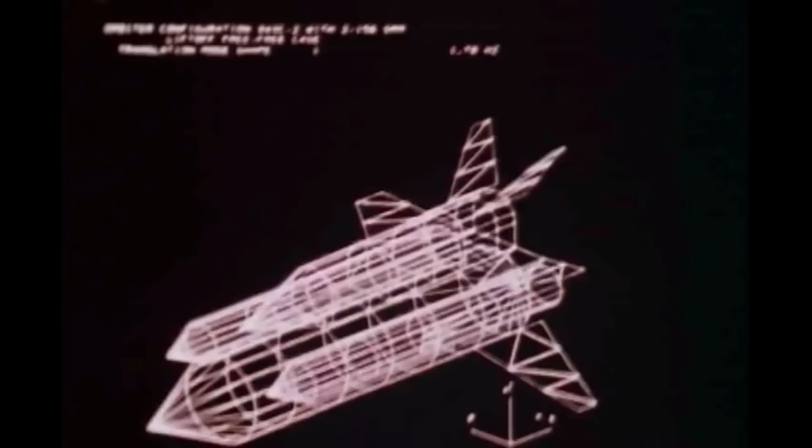So you can do tests on airplanes in wind tunnels with air as the fluid, or you can do them in water. You could substitute them, you just have to know how to translate the behaviors that you see in these different media between them.

And of course, Buckingham PI is one way, the first step in being able to figure out exactly what the controlling variables are that you should get right in your test so that the test is representative. And then the next step is to do a study on similitude, which we'll talk about today.

That allows you to make sure that your experiments are comparing apples to apples.

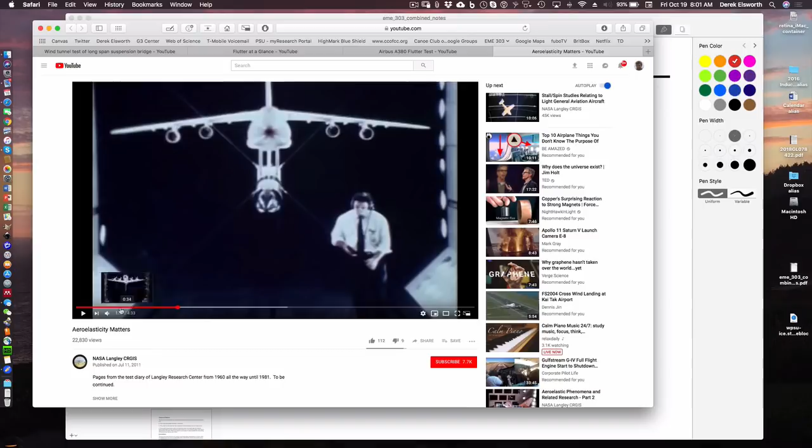I guess I don't have this playing in the background, and I don't know if this is much different. Let's look at it, we have some time this morning. I'll shut up for a moment.

That's 4 minutes. We have 4 minutes.

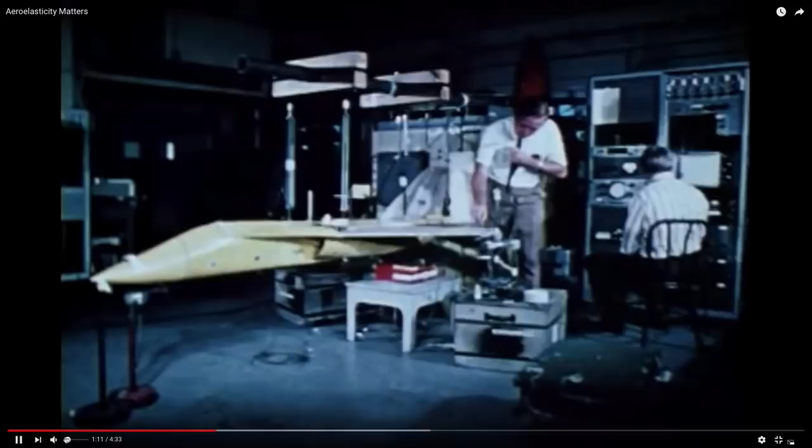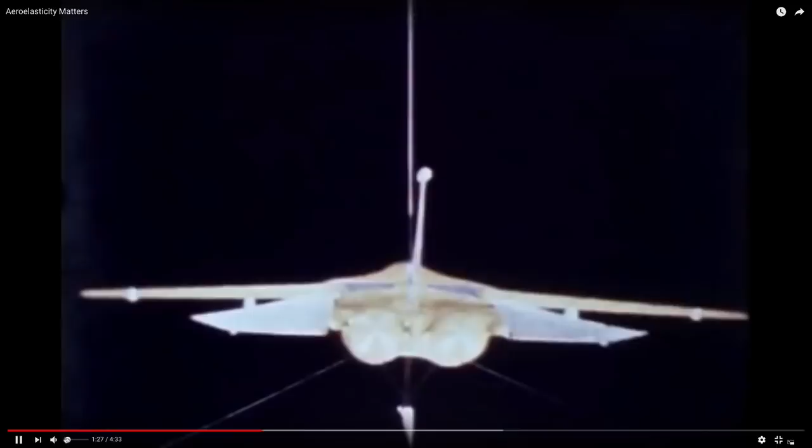Of course, this was the golden age of things like aeroelasticity. This is the late 1950s, early 1960s - Sputnik, the first satellite in space put up by the Soviets, and Kennedy's call to put a man on the moon over that decade. So understanding the behavior of flight structures, planes, missiles, rockets, was part of a national priority. And fluid mechanics and understanding these behaviors in wind tunnels is a big part of developing that understanding. So that's kind of maybe the heritage of some of this stuff.

So yeah, maybe you call it a day there and look at what we've done so far.

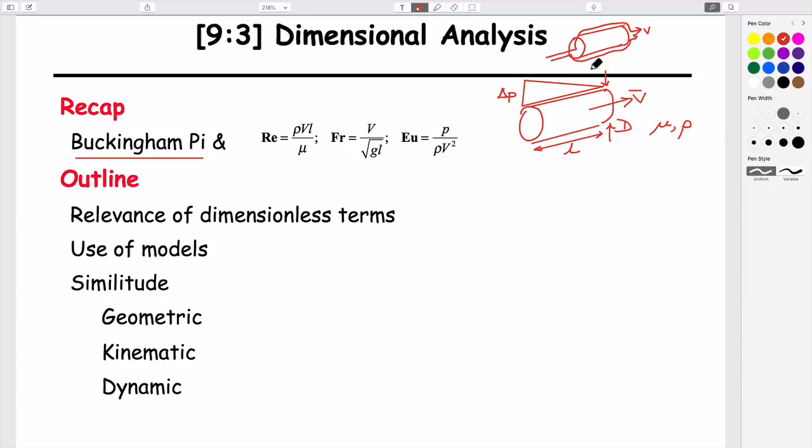In flow in a pipe, we're interested in what the velocity is as a function of the friction losses that occur within the pipe due to these viscous losses. Flow around a plug, an external structure, we're probably more interested in figuring out the magnitude of the force that we have to hold this with to be able to counteract the flow that's coming past it. So there are different things we're interested in, but really it's actually the same process.

And you recall that what we said was that maybe the change in pressure is equal to some function of the other parameters. And the other parameters are the diameter, the velocity, and the fluid properties. And we chose to lump this length variable in the form of what we call delta P over L. So from our formalism for Buckingham PI, the number of parameters describing the system are 1, 2, 3, 4, 5.

The number of M L T's was equal to 3, because all of those are represented. And as a result, what we called k minus r described the problem in terms of 2 pi variables. And those variables were, once we rearranged it in a certain way: pressure over length, V squared, rho times D, and it's some function of velocity, density, a characteristic dimension, and viscosity.

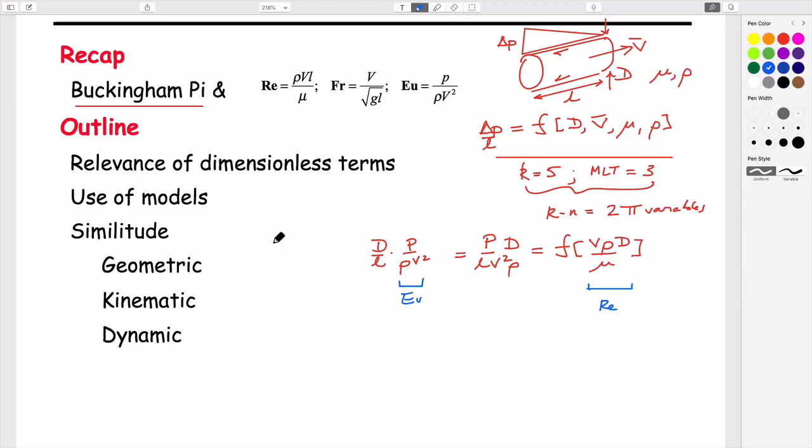We made the point that these are important parameters which we'll use when we talk about similitude, which we'll get to a little later. What we could also have done is, instead of defining the behavior in terms of these 5 parameters, we could have defined it in terms of 6 parameters by adding, in addition to those 4 on the right hand side, velocity, diameter, viscosity, and density, the length variable as well.

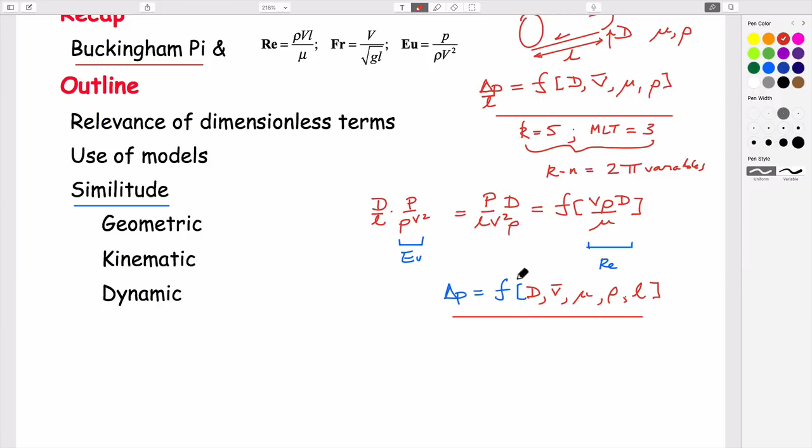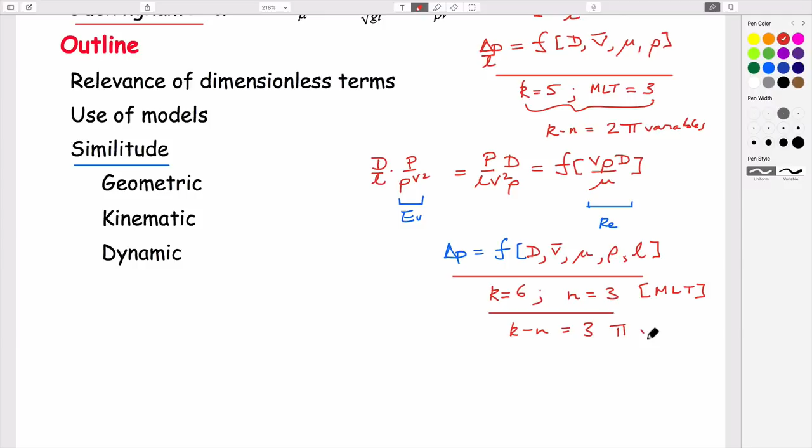If we'd gone through this with the same analysis, K would have been 6, N would have been 3, because mass, length, and time are all represented. As a result, k minus r would equal 3 pi variables. That would give us the Euler number, p over rho v squared, equal to some function of L over D or D over L, and the Reynolds number would come out of it.

So the parameters that come out of it aren't unique. They definitely are dimensionless by definition. We can check that, and we have checked that.

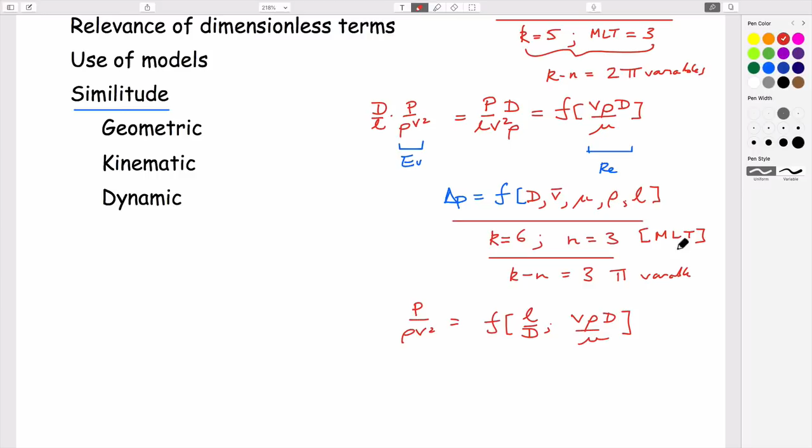If we chose some extra variables, we'd find that if we added something like relative roughness—since pipes aren't infinitely smooth with zero undulations, you could imagine the magnitude of some roughness, which we'll call epsilon, the height of the amplitude of roughness in the walls—if we had that as an extra variable, we'd have 7 variables, still with a maximum of 3, so we'd have another dimensionless variable, something like this.

So as you add extra variables to define your system, you end up with more dimensionless groups. Of course, some of these parameters might not be of any interest in controlling the system, but you have them anyway, and you could do experiments to eliminate them and see if they have any influence on the system.

So the supposition from this would be—we did it before—let's see, we had the fact that if we know the actual relationship for flow in a pipe, the average velocity is equal to the diameter squared over 32, times 1 over viscosity, times dp dx. That's a solution for laminar flow, which anchors the velocity of flow at the wall to be 0 and has a maximum in the middle.

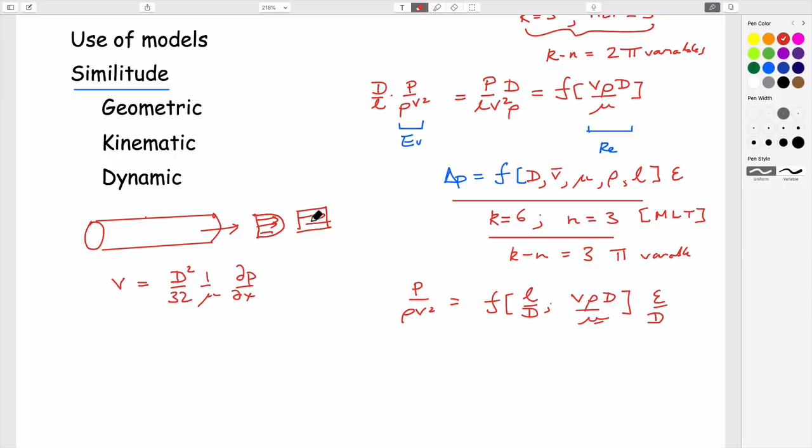We're interested in kind of an average, an assumed average velocity, which we call v bar. I think we did this last, maybe on Monday. We could convert this into something useful in terms of what we think is controlling the system, in terms of Euler number and Reynolds number, by making this an Euler number. So to make it an Euler number, or 1 over an Euler number, we could multiply both sides by v.

We could multiply both sides by density, and divide both sides through by P or dP. Our reason for doing that is now we get rid of this—we don't care about the dP. If we write that out in longhand, we have rho v squared over p, which should be familiar.

We take one of these d's and put it over here. We're going to have v times density times a characteristic dimension, d, and we're going to have mu rather, and we have an extra component here. This we can substitute for L. So we have rho v squared over p is equal to d over L.

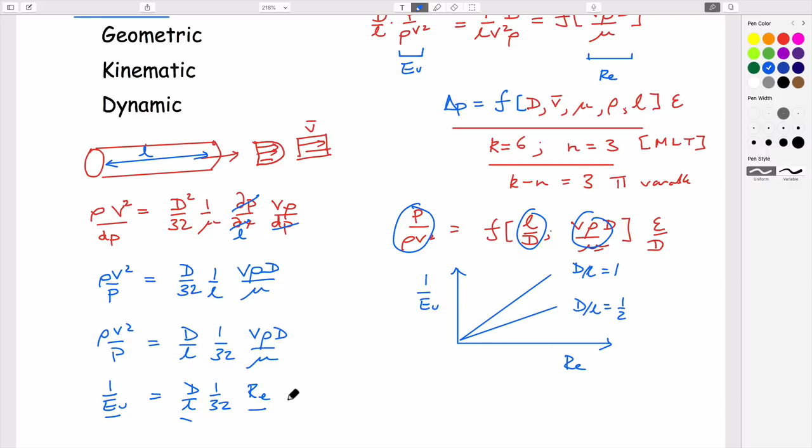This suggested there were three variables, this one and this one, before we added this fourth variable. This describes what goes on in the system. So what we'll find is that as we look at these behaviors, we could plot this as the reciprocal of Euler number, or plot Reynolds number versus Euler number. If we do that, we can imagine low Reynolds numbers will have a big Euler number, and at high Reynolds numbers we'll have a small Euler number because of this relation. This is the relationship we've kind of drawn a couple of times before.

This may look something like this. This is laminar, for which this is the equation. It's only laminar behavior, and we don't know what it's like at turbulent response, but what we'd find out is that if we looked at this at the turbulent regime, the behavior looks like this. We'll do that soon enough.

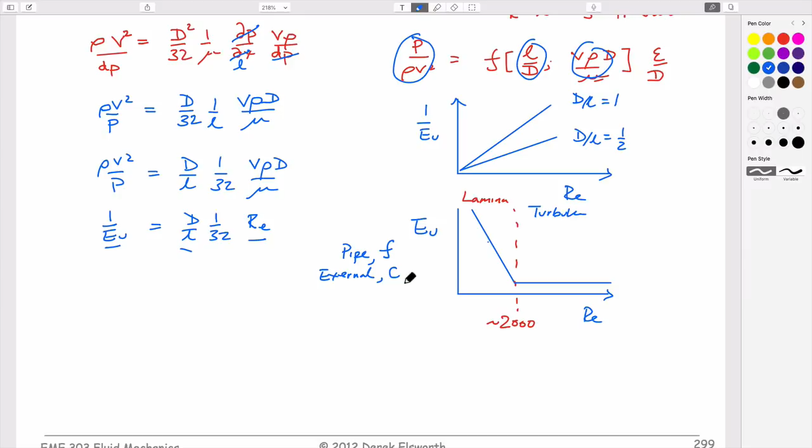So the important thing is this is kind of an Euler number. For pipe flow, we'll call this a friction factor. For external flows, we'll call this a coefficient of drag or a coefficient of lift. And for open channel flows, we'll call it a Manning number.

But they're essentially the same behaviors. They are defining some frictional losses within a system which are due to the viscosity of the fluid, or two terms I guess. This part here is due to viscous drag. This part here is due to inertial drag, accelerations that occur by making eddies.

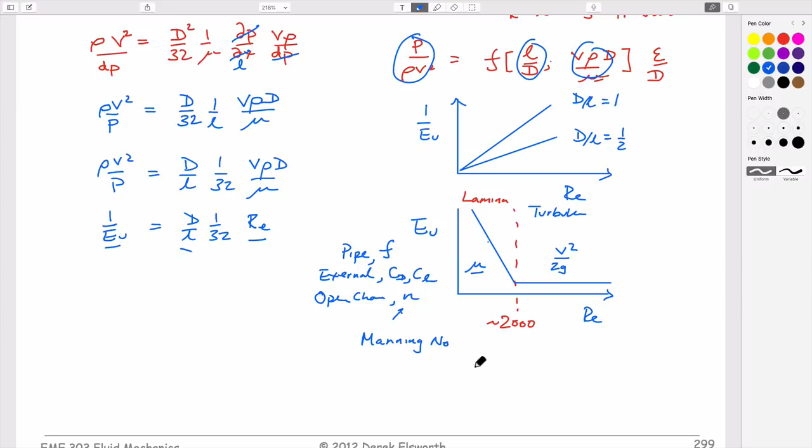If we look at the flows that occur in these, you might remember we had this little pipe flowing last time, if you were here. Within that pipe we had some flow, and with this little tracer in the middle, for laminar flows it was a straight line. But for higher Reynolds number flows, it started getting an undulation, and even faster ones got a larger undulation. This is because little vortices are occurring within the pipe that make it not laminar flow. Laminar, by definition, is a whole bunch of laminae sliding over each other.

This behavior is true when we're looking at internal flows inside pipes, external flows around windmills or wind turbine blades, or open channel flows in a ditch - there's some frictional loss that occurs by dragging the fluid against the structure. At very low Reynolds numbers it's just due to viscosity, and at much higher Reynolds numbers it's due to the fact that we get this turbulence being developed. So that's uniform in the things that we'll do.

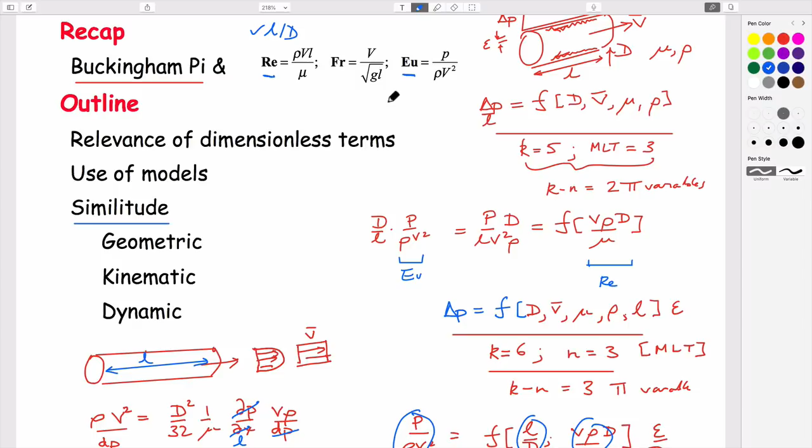So the idea of similitude is that we can use Buckingham Pi, a very powerful method, to figure out what the important dimensionless variables are. It will often turn out that they will be a ratio of lengths, L over D, a ratio of inertial forces to viscous forces in the Reynolds number, and a ratio of pressure forces applied on a structure relative to inertial forces around it, which is part of the Euler number. That, if you like, is the essence of what we can use to look at similitude in terms of these three requirements we alluded to last time that we have to satisfy.

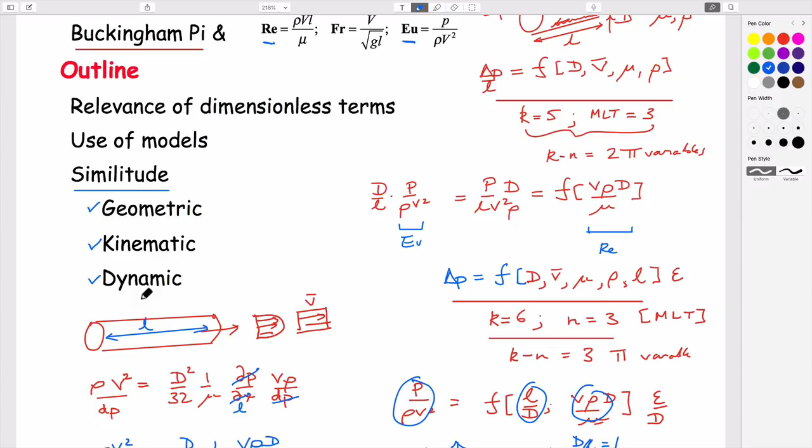That is, if we want to do wind tunnel tests on a small structure of a plane, we have to satisfy these three requirements to be able to use it in a quantitative measure to figure out exactly what the lift and drag might be.

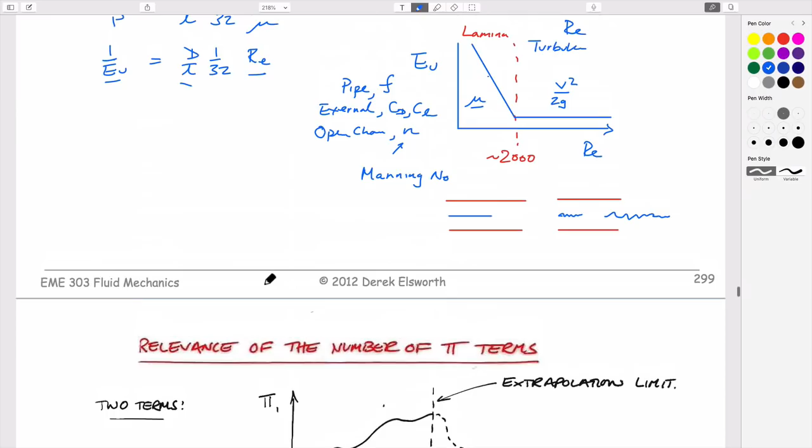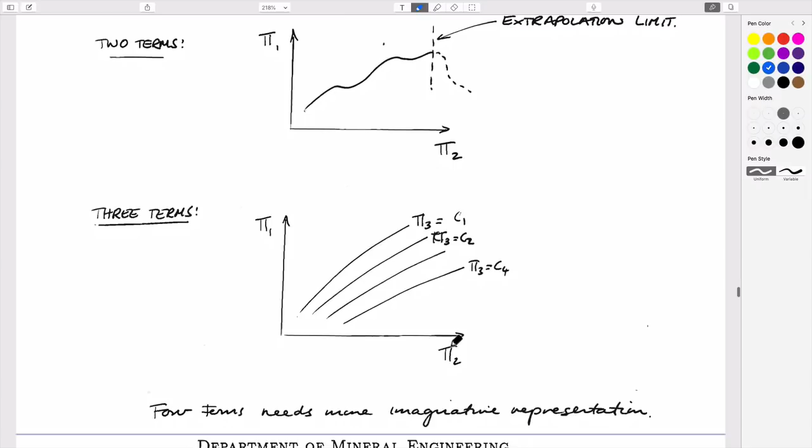This is just reiterating what we said. If you have two pi terms, then if you plot pi 1 against pi 2, there'll be some relationship and only one relationship. If you have three pi terms, as we did here, then you have three variables - pi 1 and pi 2, and then the other. So this is Euler number, this is Reynolds number maybe, and this is length over diameter ratio that defines the behavior.

So, if we want to use models, and we can do an example with this, we basically have to satisfy three requirements. It's quite straightforward. The first is that the model has to be a correct representation of what we're dealing with - so the plane has to be scaled down in every dimension. The model and the prototype have to look exactly the same as each other. So basically this is saying the length of the model and the prototype have to be equal to the width of the model and the prototype.

All of the dimensions have to scale, so it has to be a 1 to 100 scale model. And you know what that means. So if this is the model, this is an appropriate model for this prototype, but this would not be, because the length to height ratios are different. So that satisfies that you're looking at the proper structure.

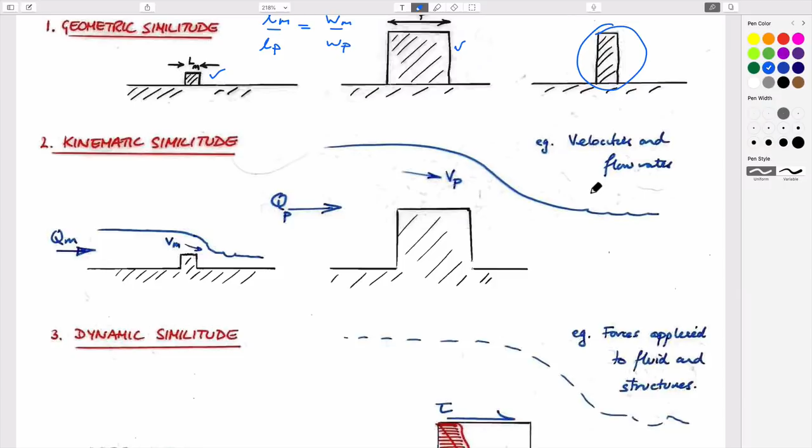The second one is that you have to satisfy kinematic similitude, and that is an exposition of the fact that the flow regime has to be the same.

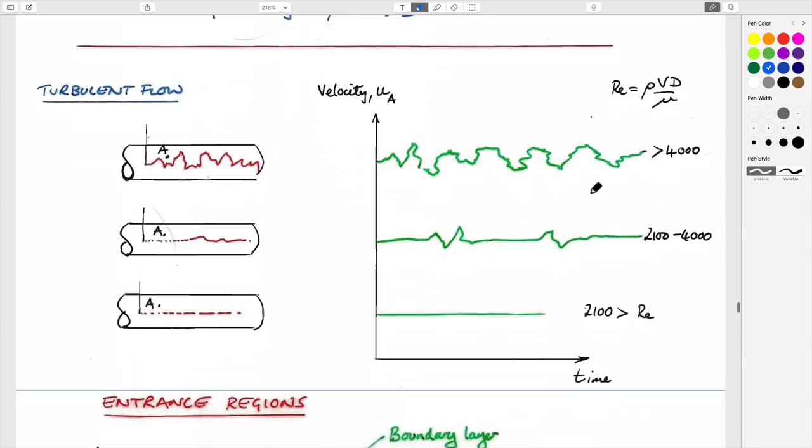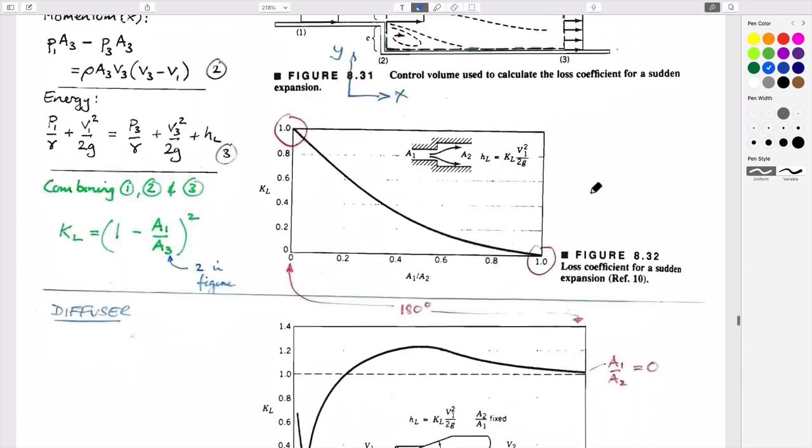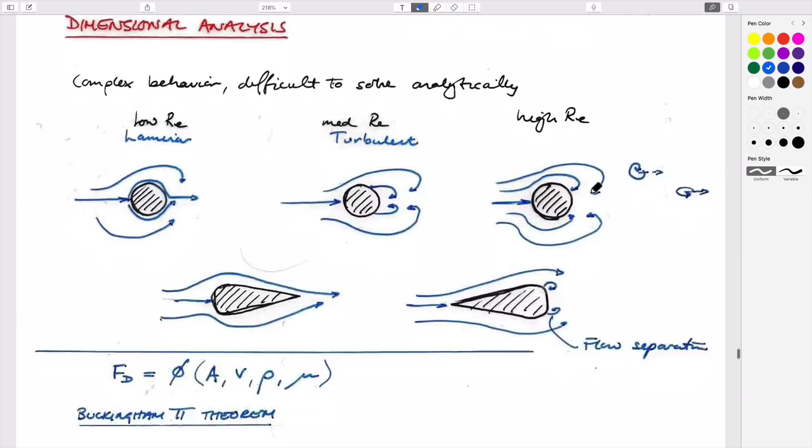Let me zip down through this to maybe what we'll talk about when we talk about external flows, because I think we've got some pictures of those. Maybe it's a bit further than I want it to be. It's a very specific diagram that I haven't... oh, these are, yeah, actually it's a long way down. So let me try and find it. Yeah, this. So there's probably a better figure than that somewhere down here.

We made this point before that if you look at Euler number, which is also coefficient of drag, we have this behavior. This is Reynolds number, maybe this is 2000, and this is laminar, controlled by viscosity, and this is turbulent, controlled by inertial behavior.

So the idea here is that the flow comes in, it's happy to come along here until it reaches a stagnation point, it divides, and it absolutely hugs this surface as it goes out on this side, and it absolutely hugs this surface as it goes out on that side. So you can imagine that the fluid exerts on this some kind of shear force, which is due to this idea of viscosity being related to the gradient of the velocity close to this.

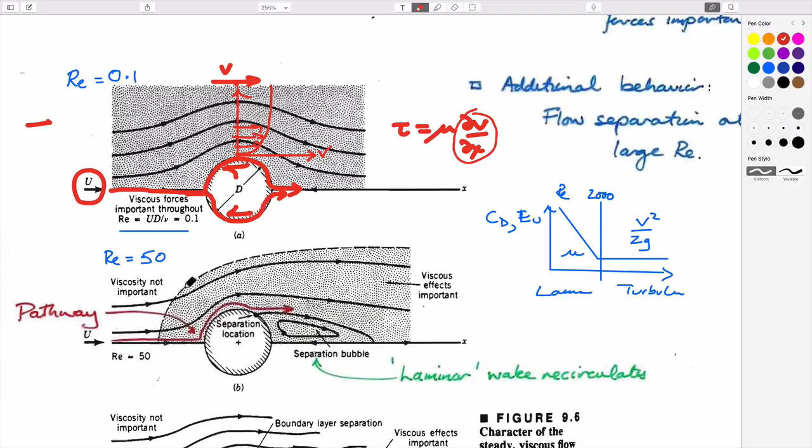If you look at higher Reynolds numbers, then what you end up doing - it's not shown very well here, actually this is even higher, right, this is probably a better one - so this is 10 to the 5, so 100,000, not just 2,000, but 100,000. Then what you get is a boundary layer developed, which is a layer where there's lots of turbulence occurring, but it's quite efficient at moving things around.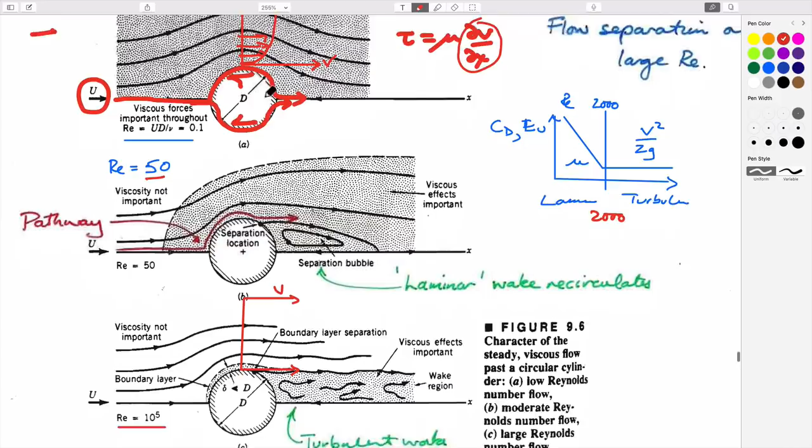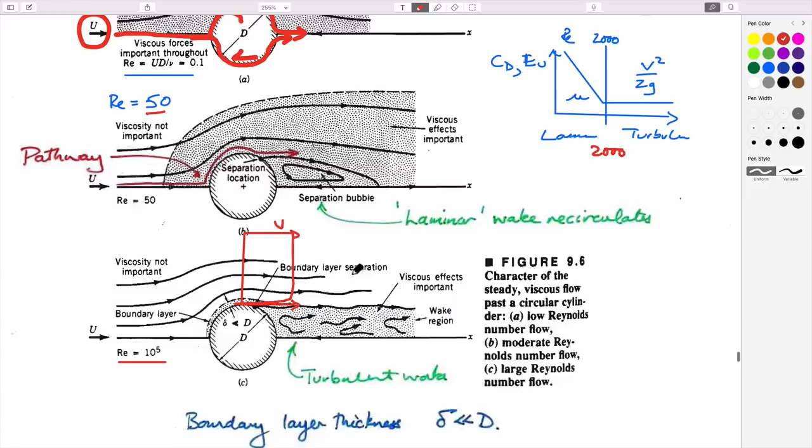If you look at the velocity profile as you go from here, you'd find surprisingly that this external velocity u, which we have at this point here, as you come close to this, it would look much closer to being this, almost like a boxcar - only when you get very close to this surface does it go to being... So you have a very large gradient here, which would suggest a very large shear force, but that's kind of isolated because you have this flow occurring on that boundary layer, which is actually quite thin.

And so there are two things that are important here. One is that now the drag on this is made up all of this changing in velocity that's occurring here. And this velocity term here, you remember, is this.

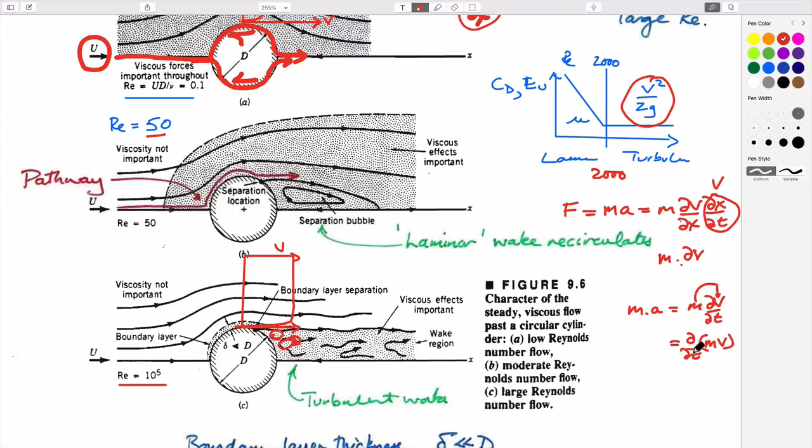So this, by definition, is velocity. This is mass times rate of change. Actually, you can do it just like this: mass times acceleration is the same as mass times the rate of change of velocity, which is exactly the same as the rate of change if we take this inside here. So this is rate of change of momentum, which is exactly what this term here is.

So there are these two very important regimes, and that's the reason we're interested in doing experiments in wind tunnels. It's quite easy to get solutions for the laminar regime, but not so easy for these different kinds of geometries. So these two different behaviors matter at these different regimes.

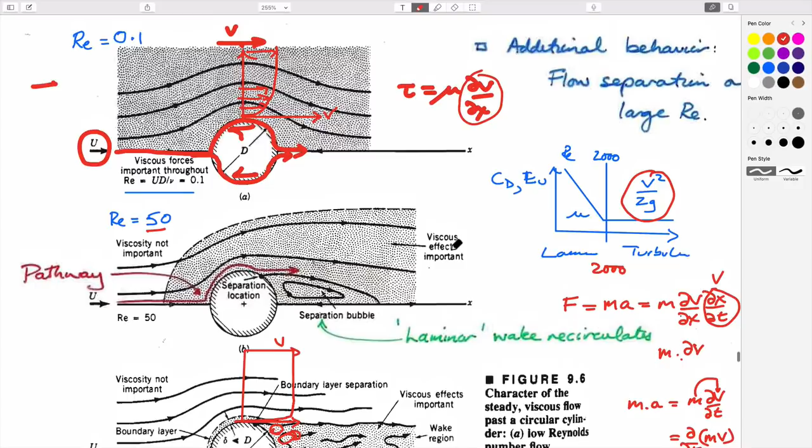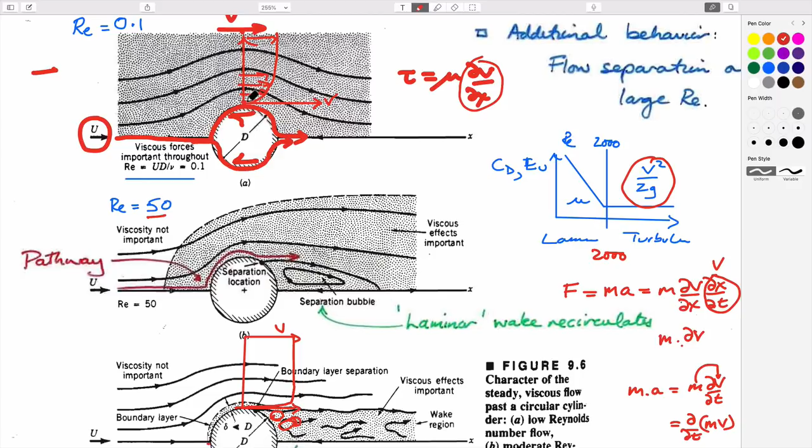The second point is that we want kinematic similitude: the flow regime around your model should look exactly the same as the flow regime you expect around your prototype plane when it's flying. If the flow regime around your model looks different from the flow regime around your A380 when it's flying, then you don't have similitude, and you can't use the results.

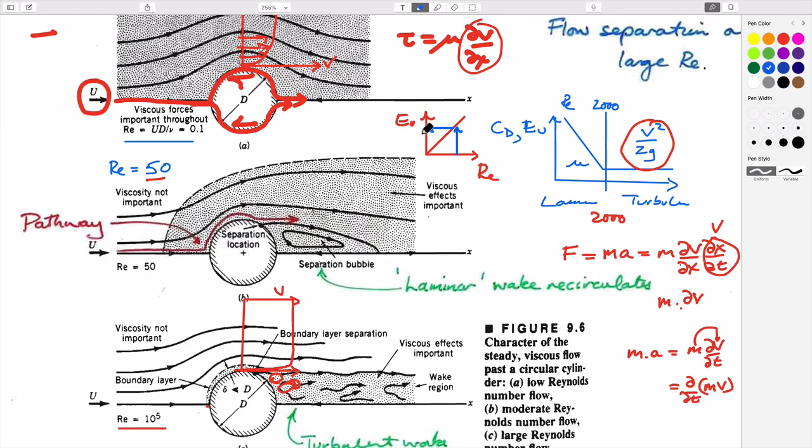In the most basic form of what we're attempting to do, we want a graph of the forces on the structure versus the Reynolds number. We expect a relationship linking these, and so long as we use the same Reynolds number in both model and prototype, we can use the same Euler number and get an exact solution. So that's kind of where we're going with this. That was maybe more of a diversion than we needed.

I think I'm in the right zone here to find that piece. Okay, so kinematic similitude means that geometrically the flow regime looks exactly the same in the model and in the prototype. And if that's the case, then we presumably also satisfy dynamic similitude.

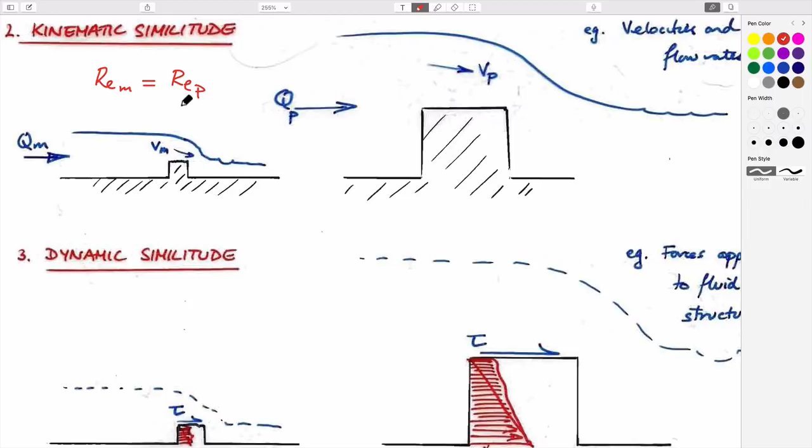This just means the Reynolds number of the model has to equal the Reynolds number of the prototype. Dynamic similitude means the Euler number of the model is equal to the Euler number of the prototype. So if in your model, where the flow is at an appropriate Reynolds number relative to your prototype, you measure the forces applied - your airplane on the stick, or the Raptor gets picked up by lift from the airflow around it - you measure that force, you measure the drag, then you can convert that into the appropriate forces on a life-size structure.

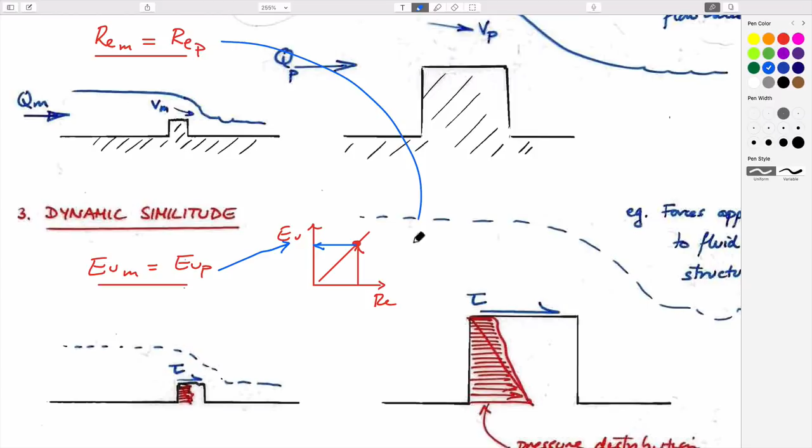So really this is just using, in its basest sense, the idea that if you have these two main variables that control response, you have a relationship between them. You don't actually need to know what this relationship is, because if the Reynolds number of both the model and the prototype are the same, then you're always at this point - not anywhere along here, just at this one point. And if you're at this one point, you can always define that this is this point here, and this is this point here. That's it, that's the idea of similitude and how it might apply.

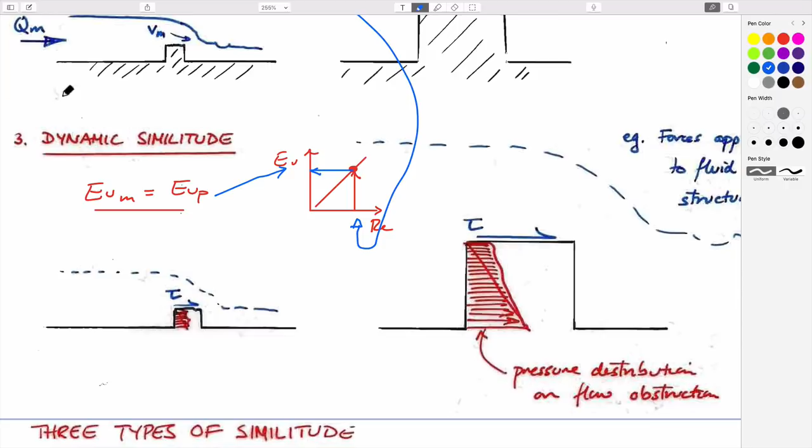The easiest way to show that might be to do an example by hand. There's some in the book as well, which we can get to if we have time. But this is just a simple contrived example of a model plane and a prototype.

So the idea is that we have a plane in a wind tunnel. Let's see how good I am at drawing this. This is the tail plane - pretty good, don't you think? It has a wing length, a wing width of the model. And we have a prototype which hopefully should look the same, with a wing length or span of the prototype, and a wing width of the prototype.

There's some velocity in the model, and some force due to lift on the airfoil of the model. So I have some numbers for these - what are we going to do? The length of the model is equal to 1 meter. The width of the model wing is 1/10 of that. The velocity is equal to 1 meter a second, just keeping life easy. And the force is equal to 1 Newton. So all of those are things that we could measure.

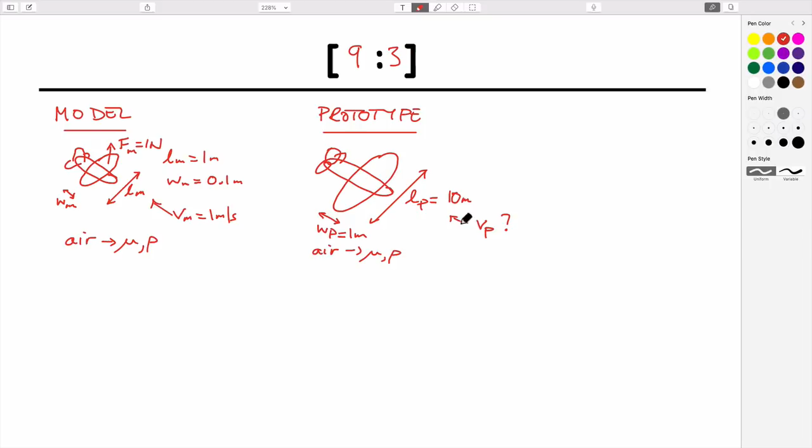And we use this length to be equal to, for the real plane, 10 meters. This is equal to 1 meter. And I guess the questions would be: in the prototype, what is the velocity we fly at? And at that velocity, what would be the force that we get out of it? So that's a simple example.

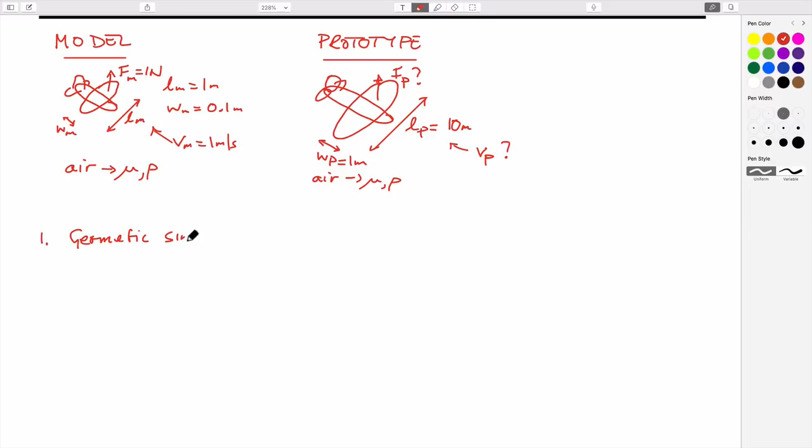So we just need to approach our three requirements. So geometric similitude: the length of the model to the length of the prototype is equal to 1/10, right? The width of the model to the width of the wing of the prototype is equal to 1/10. So all of these characteristic dimensions are shrunk down. So we've satisfied that, we've ticked off one of them.

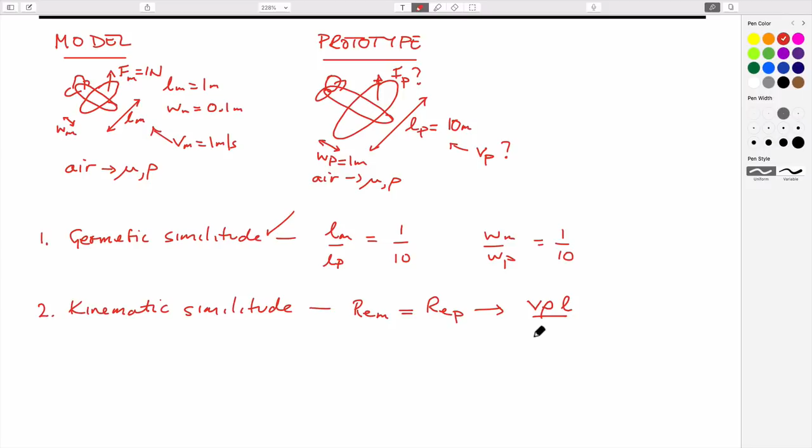The second is kinematic similitude. By definition, we want the flow patterns around each of these systems to look the same. So that means the Reynolds number of the model has to equal the Reynolds number of the prototype. That means velocity, density, and some characteristic length dimension - it could be any of our length dimensions - and the viscosity of the fluid for the model has to equal the same for the prototype.

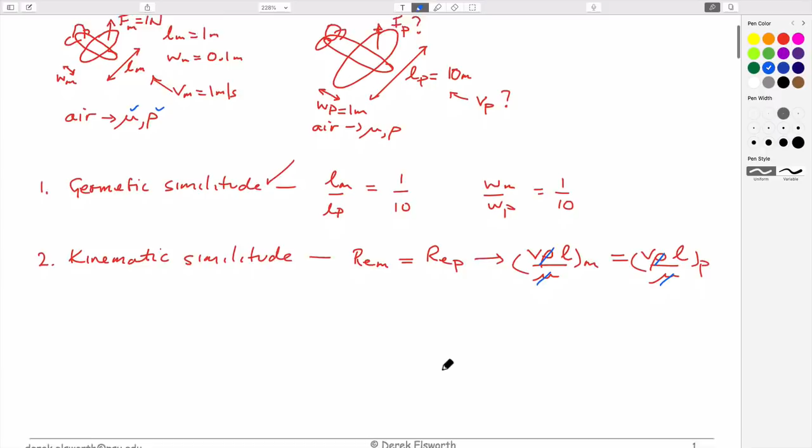We're flying in the same materials, so we know that these will cancel out with each other. And so from that, what do we want to know? We want to know what the velocity of the prototype would be. And so I suppose that would be the velocity of the model multiplied by the length of the model divided by the length of the prototype, which is this here, equals the velocity of the prototype.

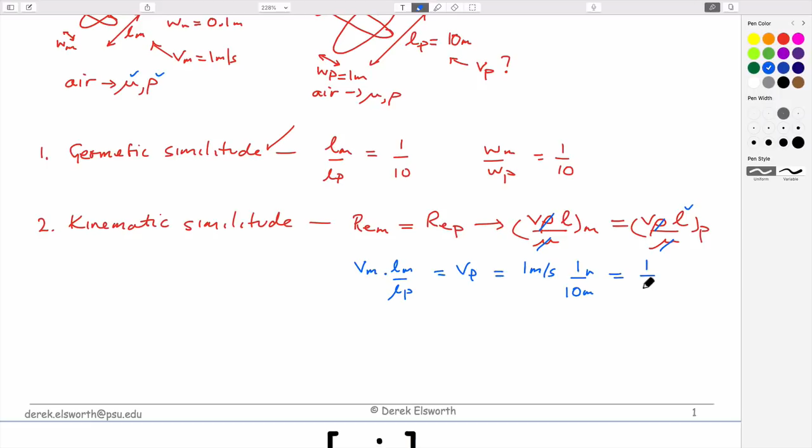So if you put those numbers in, the velocity of the model was 1 meter a second, the length of the model was 1 meter, and the length of the prototype was 10 meters. So that is equal to 1/10 of a meter a second. So that's saying that if we run this as 1/10 of a meter a second, then we satisfy this requirement.

And so that means that on this figure where we plot Euler number versus Reynolds number, we're exactly at some point - let me get rid of this - we're exactly at some point which is the same Reynolds number for each one, and therefore the Euler numbers should be equivalent to each other. We're at this point.

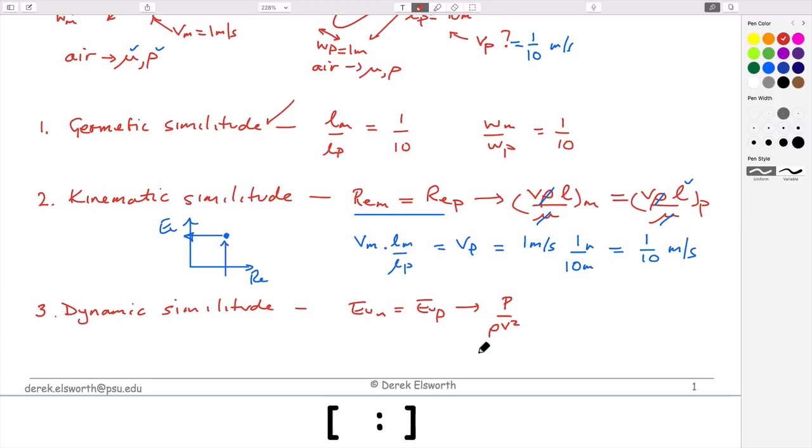So the third thing then is if we have satisfied this, then we can satisfy dynamic similitude - that the forces on the two structures are in harmony, if you like, are similar to each other. So that is that the Euler number on the model is equal to the Euler number on the prototype, which means that pressure divided by rho v squared is equivalent for both of them.

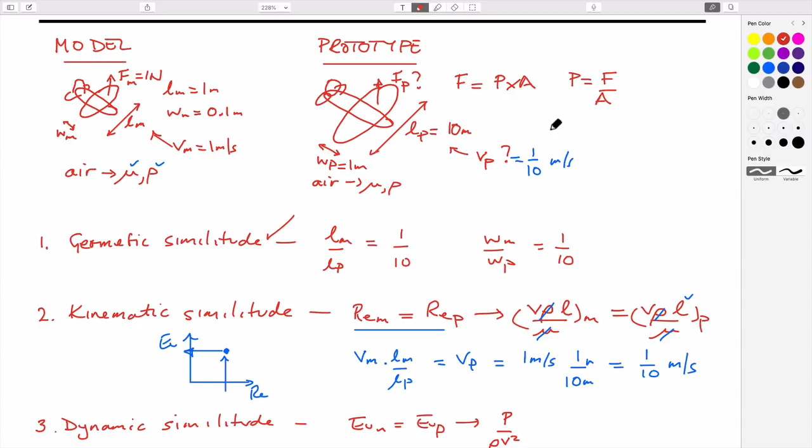We know that force is equal to pressure times area. So pressure is equal to force over area, right? You can think of this as a pressure mismatch between what's on the underside of the wing versus on top of the wing. You know exactly that that's why planes fly - you have a lower pressure above the wing than you do below, so it gets pushed up. And so this net pressure multiplied over the area of the surface gives you a force. And the force is what you'd measure if you're in a wind tunnel.

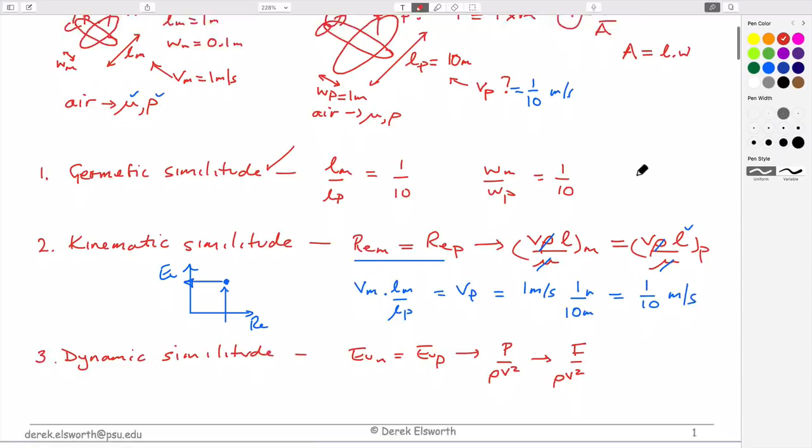And so we can substitute this here. This would be that the force divided by rho v squared, and this area - the area could be equal to the length times the width of the wing, or it could be L squared, or it could be W squared. It doesn't really matter, let's use LW, and that is for the model. And this has to equal the same for the prototype.

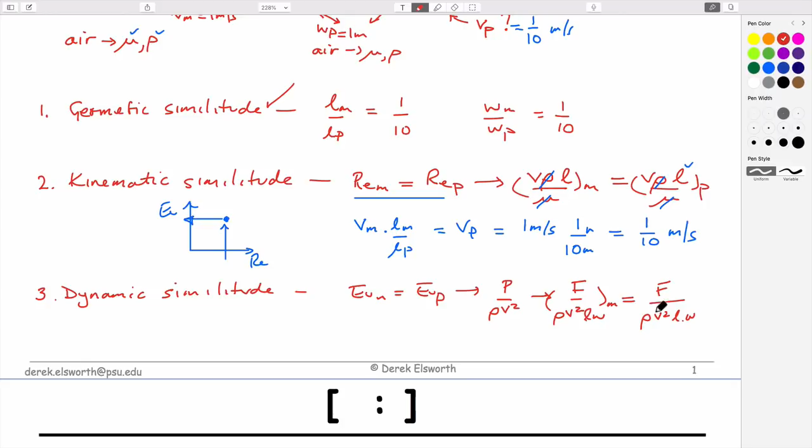Running out of space a bit, but what we'd like to do is figure out what this is. And so if that's the case, then we can rearrange it, I guess, in terms of this: that the force on the prototype is equal to the force on the model, times the ratio of rho prototype over rho model, v squared prototype over v squared model, L prototype over L model. Am I missing anything else?

No, that's it, right? And so if we do that, we have the force on the model was 1 Newton. Densities, we don't care because it's the same fluid. The length to width ratio of the prototype, this is each one of these is 10 to 1, right? So this is 10 meters and this is 1 meter. This is 1 meter and this is 0.1 meters. So this is 100, or 10 times 10 over 1.

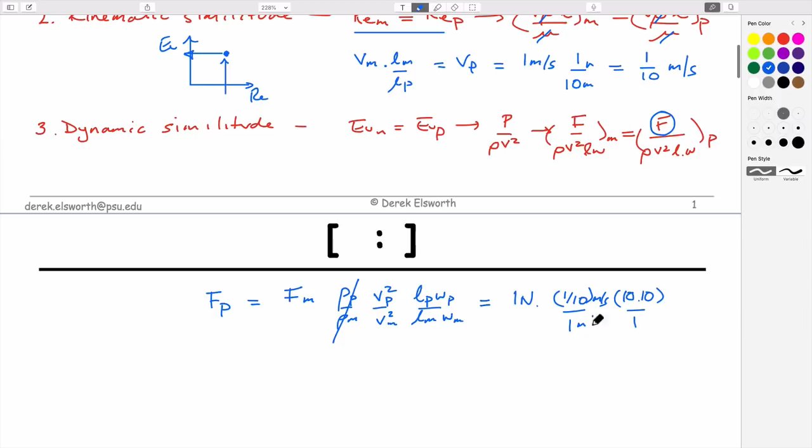And Vp squared over Vm squared, what was it? The prototype was 1/10 of a meter a second, and the velocity on the other one was a meter a second. So this says that this is equal to 1 over 10... oh, didn't square it, squared, and squared, right, because of this.

So this is 1 over 10 times 10, and this is 10 times 10, so this is just 1 Newton. So the force on the prototype probably won't get you off the ground, but by just using this similitude, because we exist in terms of Reynolds number and Euler number for both model and prototype at some number here, that's allowed us to calculate what the force is on the prototype, which is useful to us.

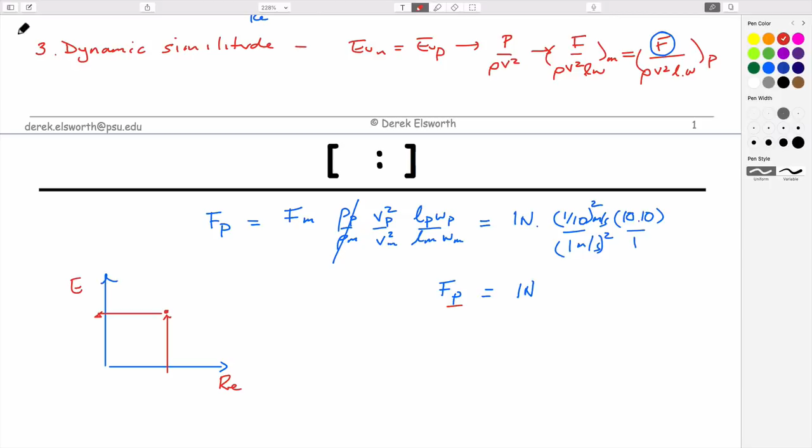But of course, we might be interested in not doing it at the same velocity, and so then we'd need to have some other corresponding experiments at different velocities to be able to say what's going on. But what we could do is hark back to this idea that we had from here.

And that is that we know a little bit about what we might expect these force distributions to be as we change different Reynolds numbers. So for instance, although we've done it right now for a value which has given us the same number that has allowed us to go over here, if our current Reynolds number was here, and we thought the relationship would take us over here, then we can do something else.

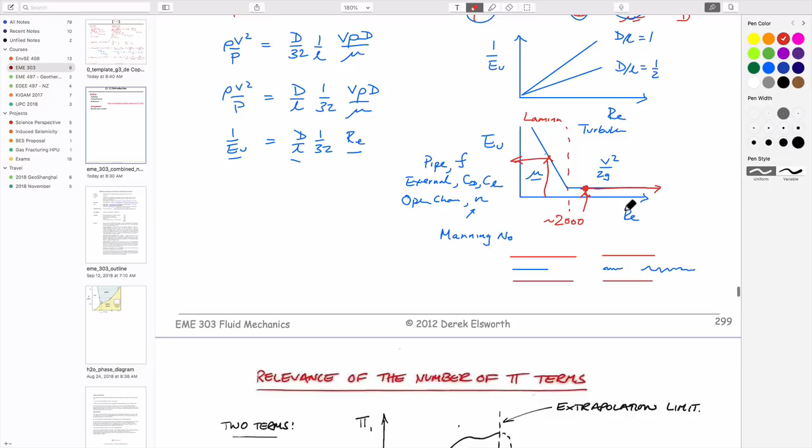What we could do is, if we thought that our graph looked like this, or that we were somewhere on here, then when we look at these different ideas of similitude, we could do an experiment knowing that if we do it at a different Reynolds number, even if we don't satisfy this, the drag or the lift is not going to vary as a function of Reynolds number.

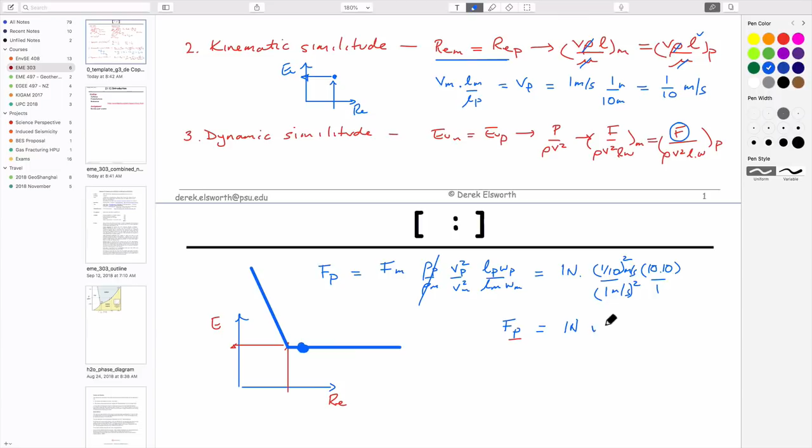If we thought our current experiment was at this location here, then we could choose to do it at a number over here. So we could violate this, and run our experiment at 10 meters a second, or 1 meter a second.

So if now we choose in the prototype v equals 1 meter a second, then we could still use this expression, and we could calculate the force in the prototype if we run at this particular velocity. It's going to be equal to 1 Newton multiplied by, where is our velocity? So this, instead of being 1 over 10 squared, is equal to 1 squared divided by 1 squared, multiplied by, this is still going to be 10 times 10 over 1.

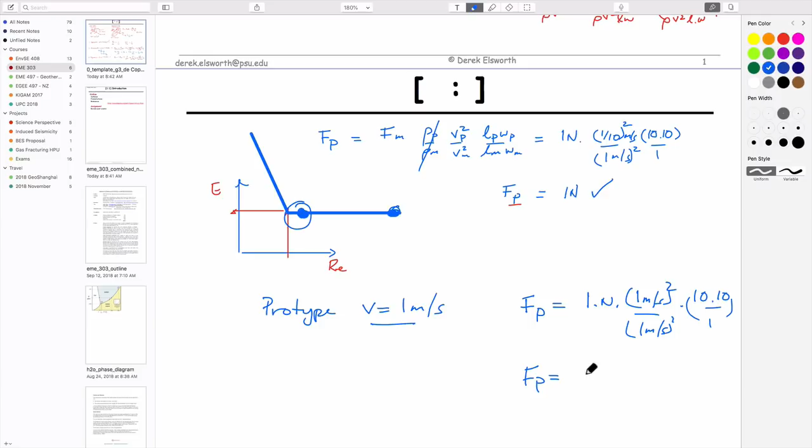So in this particular case, the force on the prototype would not be 1 Newton, but it would be 100 newtons it would pull out, which seems like something more realistic. And so these are the basic requirements of similitude that we can use.

To use them strictly for a model, you have one point in this space if you have 2 pi variables, it's Euler number. If you do the experiment at exactly the same Reynolds number, then you have exactly the same Euler number.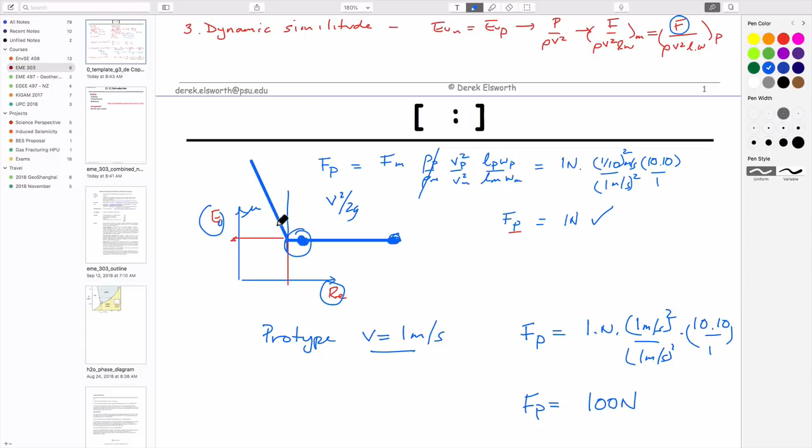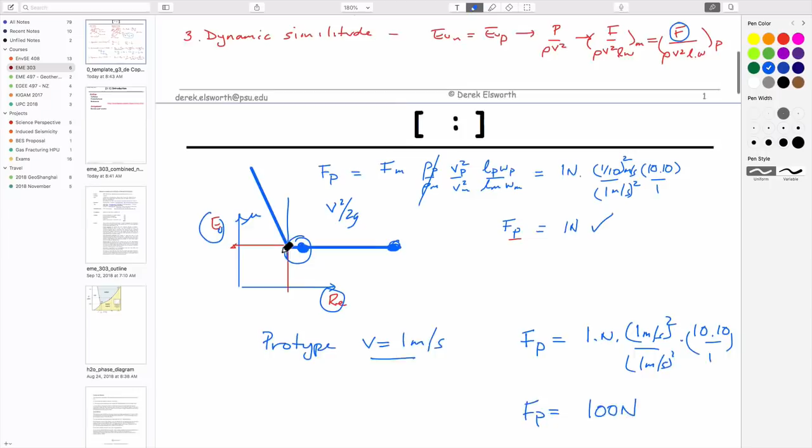But we can use it more usefully because we know something about these behaviors, and that is that this behavior over here is this turbulent response, and this is this viscous response. From what we understand about these two behaviors, we can be much more clever about the experiments we do. I think it's a cool topic because it allows you to use these principles in any experiment you choose to do, not just in fluid mechanics, but in thermodynamics as well.

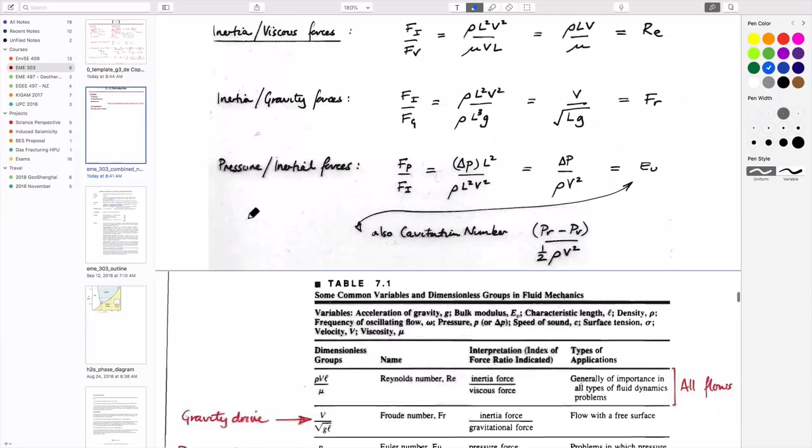What else? I'm not sure. You'll see lots of different, yeah, let's do another example just to cement the ideas. It often turns out that the variables we end up with are Reynolds number, which defines the flow field, and Euler number, which defines the forces applied on structures, but not always. It depends on the system you're dealing with. But you can always use this method to do it.

So this is just another example doing the same thing: viscous fluid flows past a submerged rectangular plate.

This drag force is a function of plate height and width. You can imagine that it's probably more a function of height than width, just because of the geometry. You're smacking and stagnating against this big plate that has a width, but I can't imagine the shear stresses on the top and bottom would make much difference.

We want models to predict the drag using a test with glycerin of a certain viscosity and size, measuring the drag force applied at a certain velocity. Is it possible to predict the drag on a similar plate with different height and width, immersed in the same liquid with the same viscosity but a different velocity?

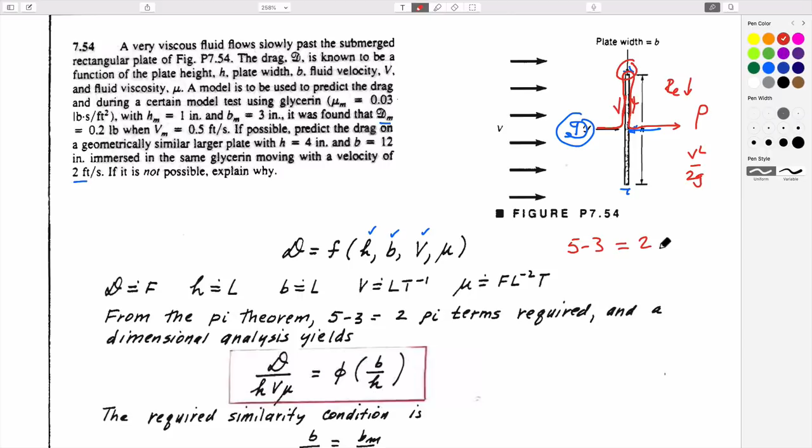So we could go through this with Buckingham PI. We have 5 variables. If we have M, L, T all represented, then we have 5 minus 3, giving us 2 pi variables. We could go through Buckingham PI to figure out what they are. And because we don't have a density, we'd get neither a Reynolds number nor a Euler number, right?

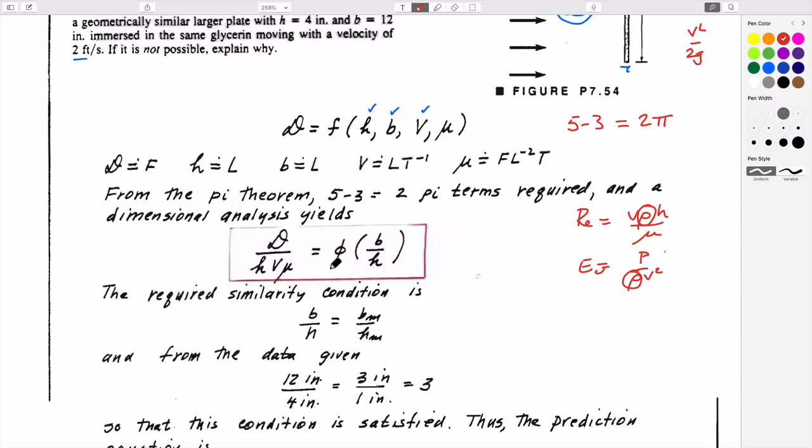Because Reynolds number is V rho H over viscosity, and Euler number is P over rho V squared, and density doesn't exist in either of these, we don't quite get a Reynolds number or an Euler number. But you can check that this is a dimensionless number—these are certainly dimensionless, a ratio of two lengths.

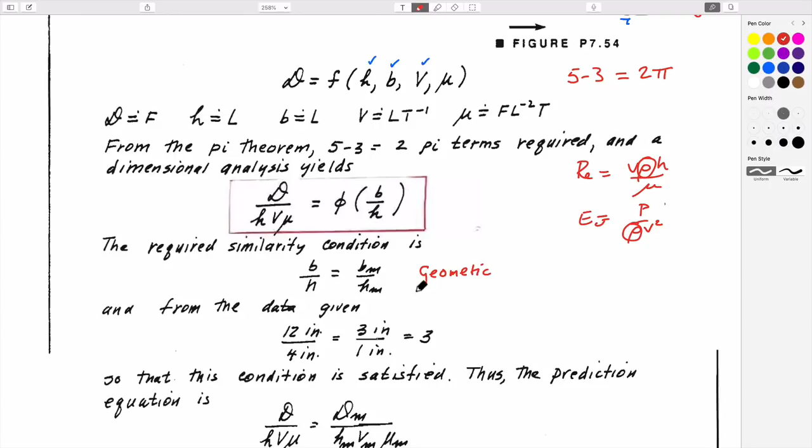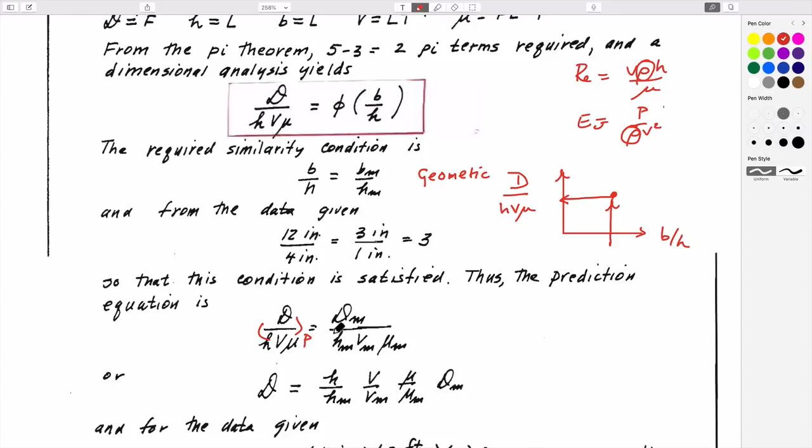So long as this is true, then it's true for both model and prototype, and we can use that to calculate the force applied on the different shaped, different sized model relative to the other one, with a different velocity flowing as well.

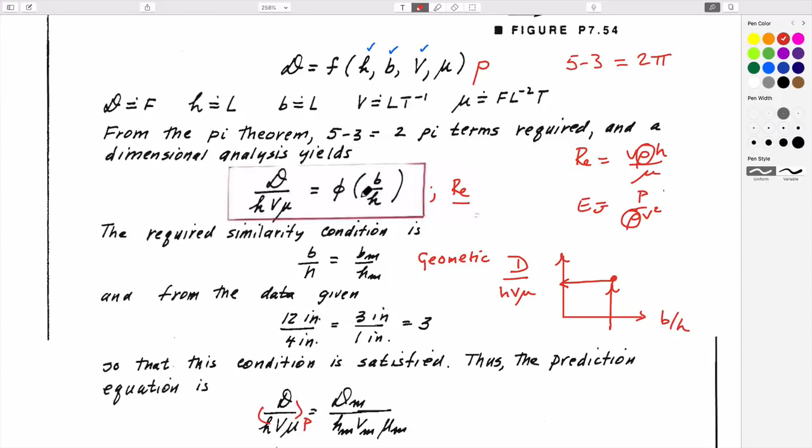We just have to be careful to realize that in this particular case, we haven't used density here. If we had density, we'd have another term—my guess is we'd also have a Reynolds number that we'd have to satisfy as well. So if we satisfied this Reynolds number, this number, and geometric similitude, then we'd have a solution. That's the issue here.

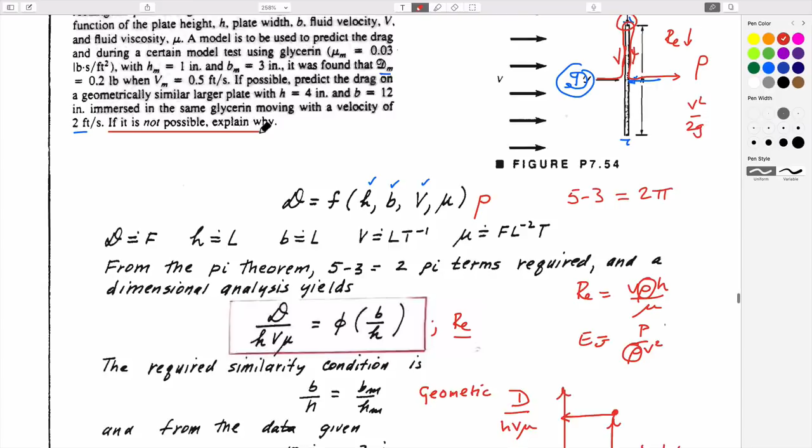It's possible, but we have to be careful in choosing our numbers. This is clearly a case where the Reynolds number is so low that we're within this part of the graph, where the Euler number, which is the same as the coefficient of drag, is in this region relative to Reynolds number.

So if we're in this region here, then actually it's not safe—we need to actually be at the same Reynolds number. We could check in this particular case if we're at the same Reynolds number, but we don't know. I guess we don't need to know what the density is, we just need to know it's the same fluid flowing past the model and the prototype. So we need to check whether the Reynolds number is actually consistent.

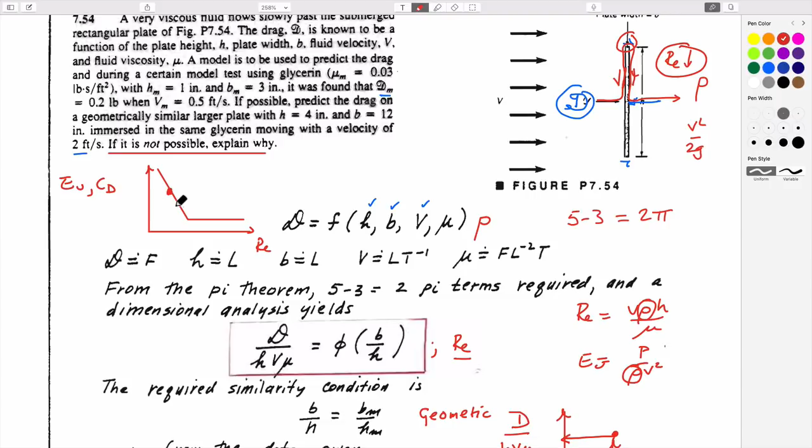So that's it. There are a couple of other examples, but we won't go through those—we'll leave it here because we're right at time.